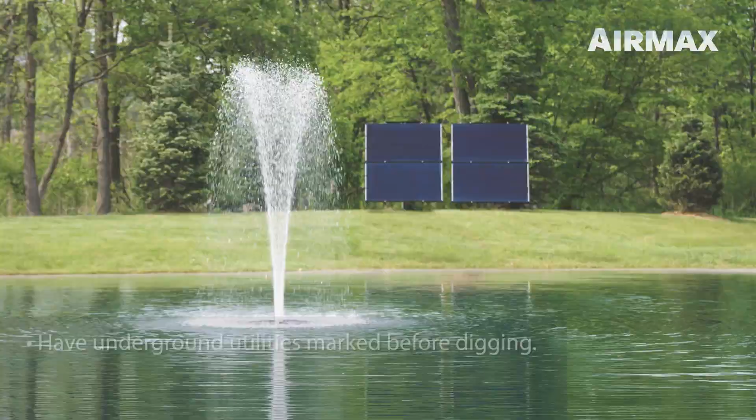Refer to your SolarSeries fountain product manual for a complete list of tools and hardware required. Before deciding on a location for the EasyMount assembly, be sure that the holes for the galvanized poles will not interfere with any underground utilities or irrigation systems. Select a location that is well above the high water mark with optimum southern exposure. The location should remain clear of any obstructions, such as shrubbery, trees, fences, or buildings that could limit exposure.

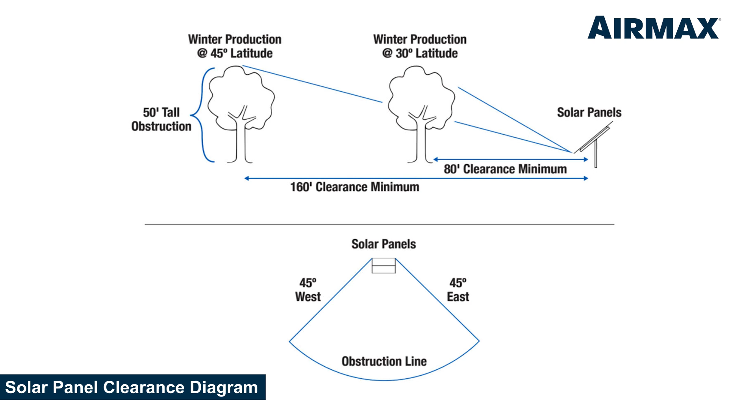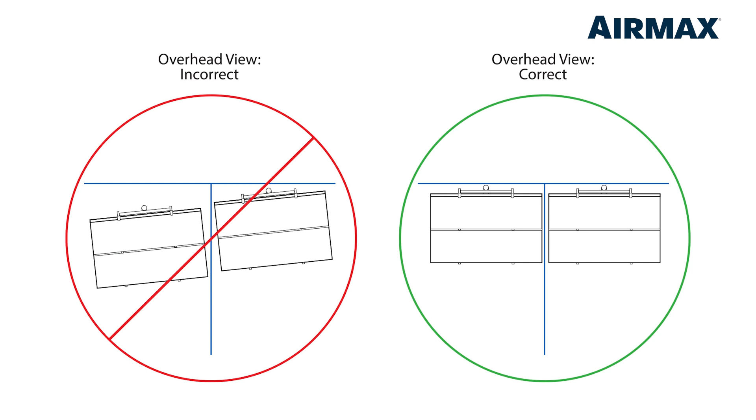Before marking out your two post hole locations, be sure to establish a plane that is perpendicular to solar south. Solar south is determined by the pivot angle needed to achieve optimum southern exposure based on geographical regions. Establishing this plane will ensure both sets of solar panels can be installed so that one assembly does not interfere with exposure to the second solar panel assembly.

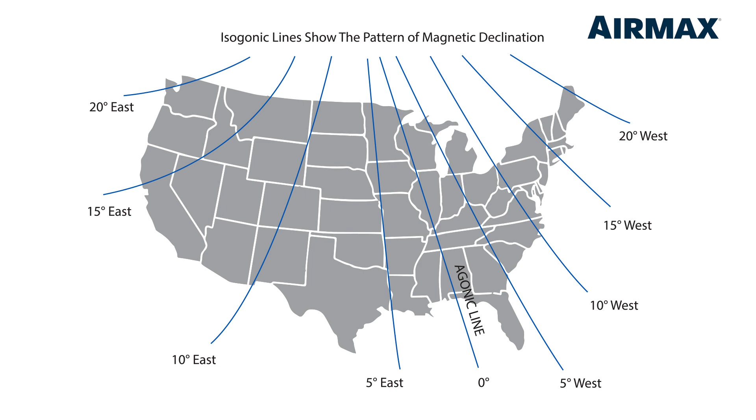To establish this plane, first, calculate the offset from magnetic south. You can refer to the National Oceanic and Atmospheric Administration website included in the product manual to calculate this offset based on your zip code. Or you can estimate the pivot angle based on your approximate location using the magnetic declination map of the continental US.

Once you've estimated your offset from magnetic south, lay one of the 10-foot galvanized poles on the ground and use a compass or compass app as a reference to position the pole perpendicular to magnetic south. Then pivot one end of the post in the appropriate direction based on the offset you establish for your region. This offset from magnetic south will establish solar south and your optimum sunlight exposure.

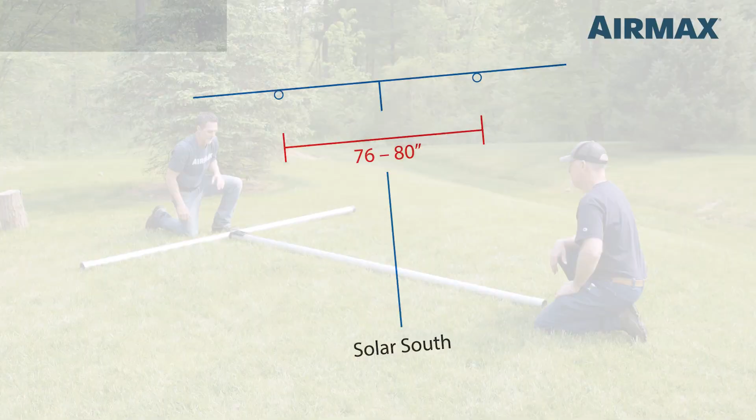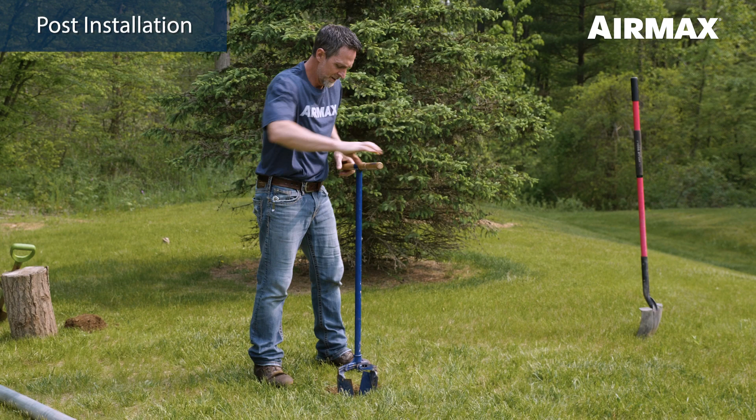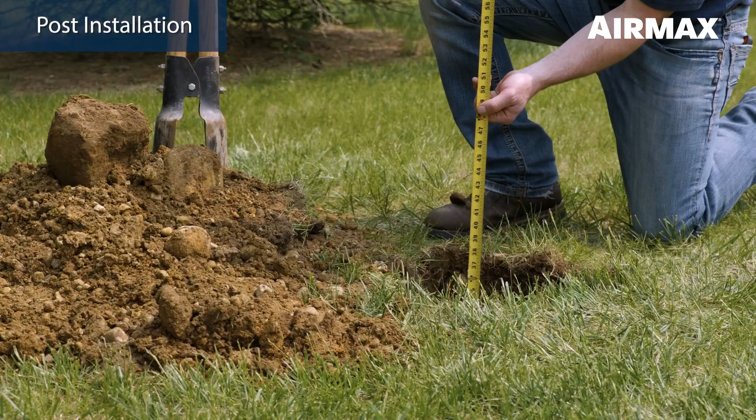The posts should be approximately 76 to 80 inches apart to leave 8 to 10 inches between each set of solar panels. This spacing will help prevent human traffic that could potentially interfere with solar panel wiring. Next, use a post hole digger or auger to create two 8-inch to 10-inch diameter holes along the line established in the previous step. Holes should be a minimum of 36 inches deep. This depth should leave you approximately 84 inches above grade for your EasyMount assembly.

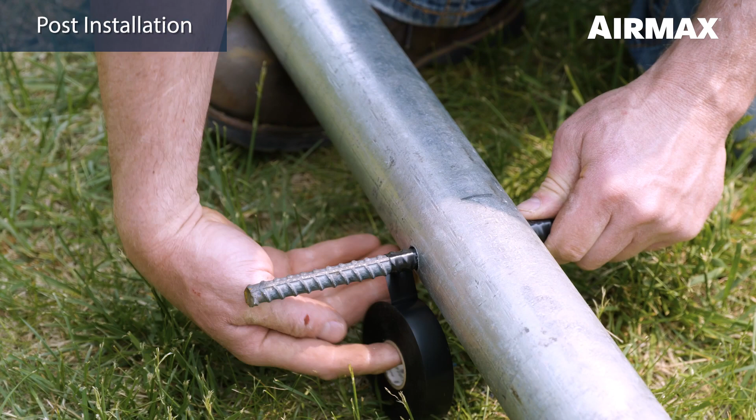Use a 5/8 inch drill bit to drill a hole through each pole 8 to 10 inches up from the bottom. It may be helpful to pre-drill a pilot hole with a smaller drill bit first. Insert a 1/2-inch piece of rebar into each hole so that an equal amount shows out each side. Hold the rebar in place with tape or a zip tie to keep it centered in the post until it is set. This step is important to keep the post from rotating in the concrete under high wind conditions. We also advise against the use of pre-cut cardboard tubes inside the holes for the same reason. The use of such tubes can lead to the entire cylinder of concrete rotating under windy conditions.

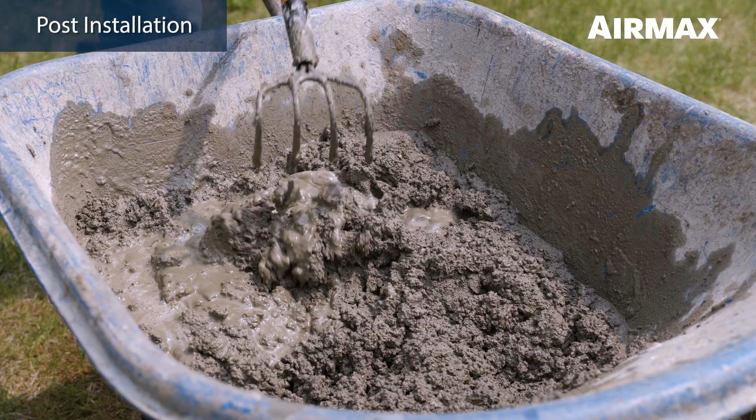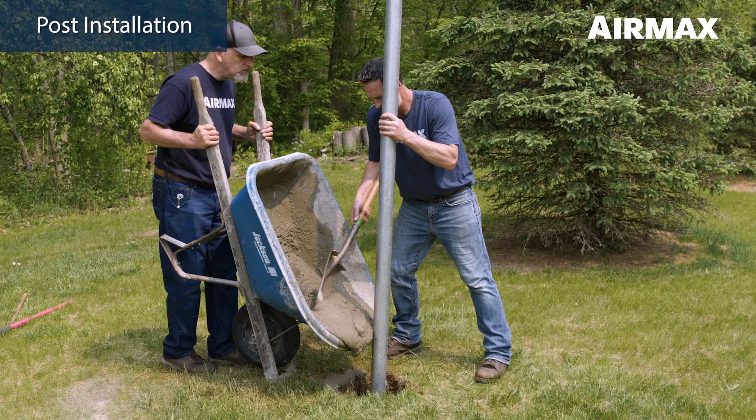Mix the concrete and water in a wheelbarrow according to the manufacturer's recommendations. Place a post in the center of the first hole and pour concrete into the hole until it is approximately 4 to 6 inches below grade. Keeping concrete slightly below grade will prevent curbing, which can lead to heaving during springtime frost in colder climates. Repeat for the second post. Plumb posts with a level and brace using 2x4 studs, clamps, and stakes. Allow a minimum of 48 hours cure time before installing the Airmax EasyMount assemblies and solar panels.

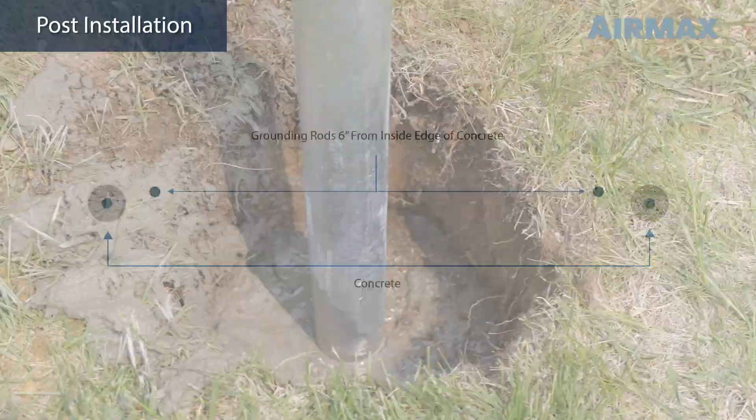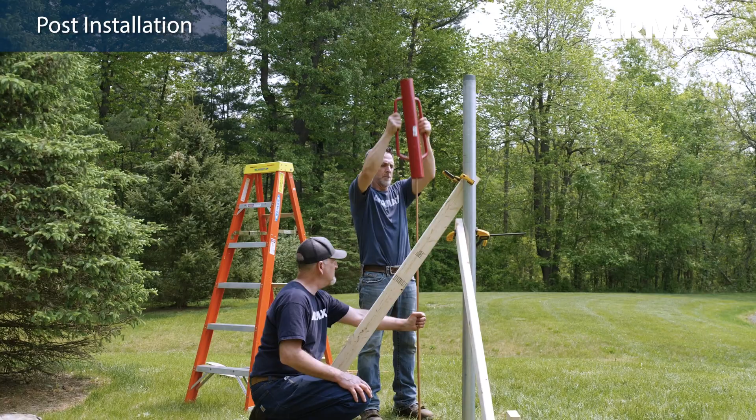We recommend installing the two grounding rods while the concrete cures. Drive an 8-foot grounding rod into the ground 6 inches away from the inside edge of the concrete, leaving approximately 6 inches exposed above grade. Repeat for the second mounting post. This rod will be used later in the grounding section of the installation procedure. The rods can be driven below grade after the rest of the system is installed and properly grounded. Before installing your EasyMount assembly, we recommend digging a trench for your power cord between the post and shore.

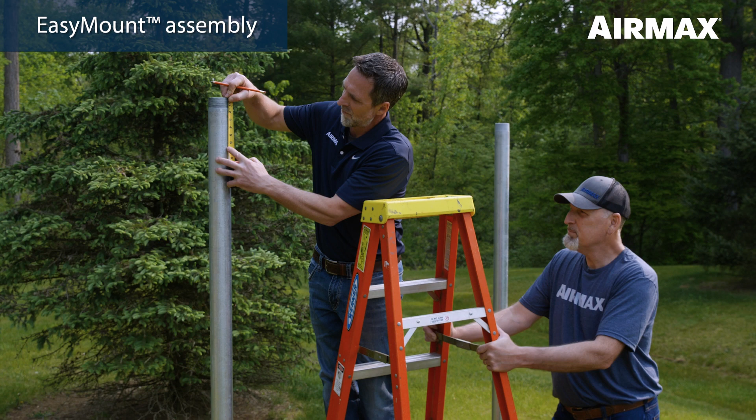To begin installation of your Airmax EasyMount system, first establish the recommended height for the main assembly by measuring down 3 inches from the top of each post and mark using a pencil or marker.

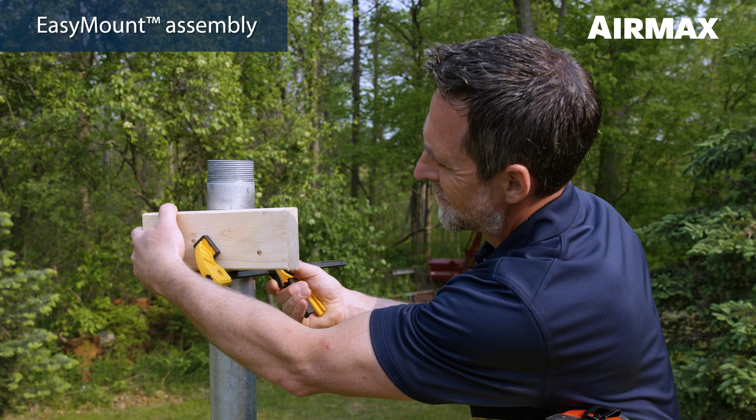If installing with one person, we recommend clamping a 2x4 block 4 to 6 inches long to the post at the 3-inch mark using a large clamp. This block will provide a shoulder or shelf for the upper beam of the EasyMount main assembly to rest on while installing the U-bolts in the next step.

First, rest the EasyMount main assembly upper beam on your block and secure in place using the two U-bolts, washers, lock washers, and nuts. Tighten a half-turn past hand tight using a 3/4 inch deep well socket wrench. Secure the lower pole mount beam with the second U-bolt and tighten 1/2 turn past hand tight. Leave the U-bolts loose enough to pivot the assembly.

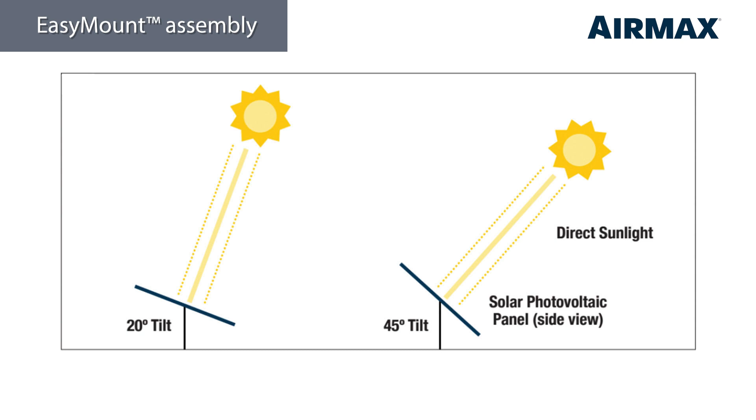Next, pivot the EasyMount assembly in the desired direction to face solar south, based on the recommended angle for your region, and tighten all 4 bolts securely using a 3/4 inch deep well socket wrench. Use the latitude of your region to set the optimum tilt angle. Some smartphones or compass apps will include your latitude and longitude on the screen, or you can refer back to the NOAA website recommended in the product manual.

If neither of these options are possible, you can also refer to the table in the product manual to estimate your latitude and recommended tilt angle. If you will not be running your system in the winter months, then simply use your latitude as your reference point and set your tilt angle to the angle closest to your latitude.

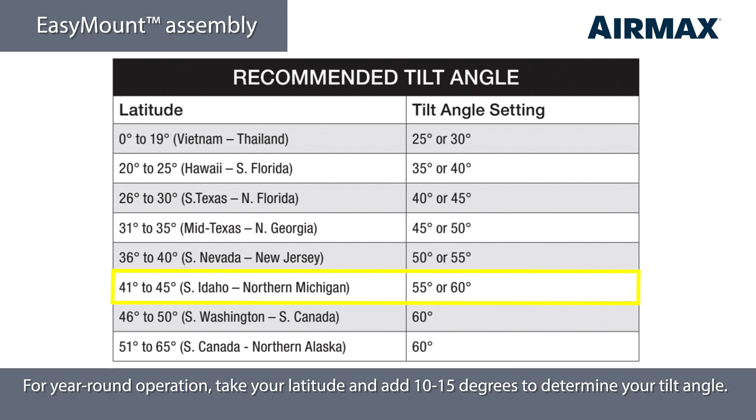However, if you plan to run your system all year, take your latitude and add between 10 and 15 degrees when setting your tilt angle to get optimum performance when daylight hours are at their shortest. For example, a 42-degree latitude should be set to 55 or 60-degree setting on the EasyMount support rail. This will give you the optimum tilt angle in the winter months when daylight hours are reduced by 50%. Solar panels will receive ample sunlight during the other seasons, even when set for winter operation.

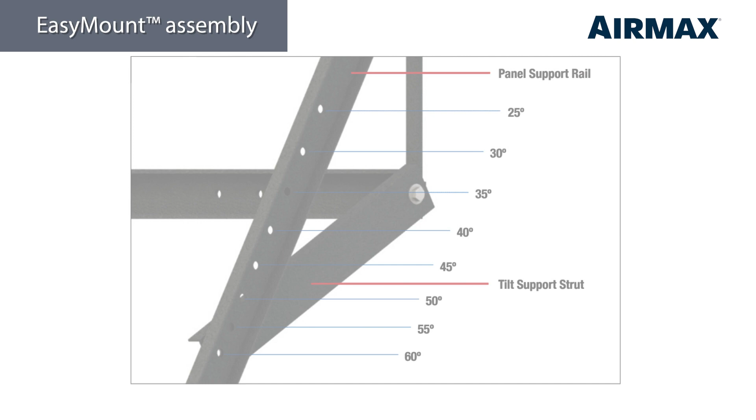Next, refer to the tilt angle settings in your product manual and attach your tilt support strut to the appropriate hole in the panel support rail. The angle settings are based off of the difference between the horizontal plane. Remove the tilt support hardware from the temporary location on the support rail. Secure each support strut in place with the tilt support hardware and tighten completely using 2 3/4 inch wrenches.

Continue by installing a panel support rail extension. First, remove the 2 bolts, lock washers, and nuts from the end of the rail extension connector and attach to the panel support rail. Tighten using one 7/16 inch wrench and one 7/16 inch socket wrench. Repeat for the opposite side. Lastly, tighten the 4 pivot bracket bolts using a 3/4 inch socket wrench. Repeat steps 1 through 8 for the second post and EasyMount assembly.

First, position a single-sided solar panel clamp at the bottom edge of one panel support rail extension and tighten using a 7/16 inch wrench. Do not tighten the top hex bolt as you will need room to slip the bottom edge of the solar panel frame into the clamp. Repeat for the second panel support rail extension.

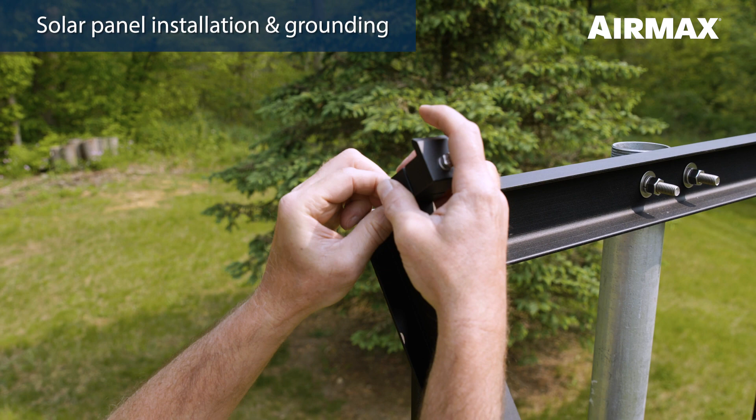Position one double-sided solar panel clamp at the joint between the panel support rail and the rail extension. Repeat for the second panel support rail extension. Place the second double-sided clamp in the same position on the opposite support rail. Next, position a single-sided solar panel clamp at the top edge of one panel support rail and hand tighten only. Repeat for the last single-sided clamp.

We recommend using 2 people when handling and installing solar panels. Avoid installing solar panels on windy days to prevent possible accidental damage to equipment. Position the first solar panel so that the wiring junction boxes will face the interior, ensuring all junction boxes face the solar panels on the adjacent solar post mount assembly once completed.

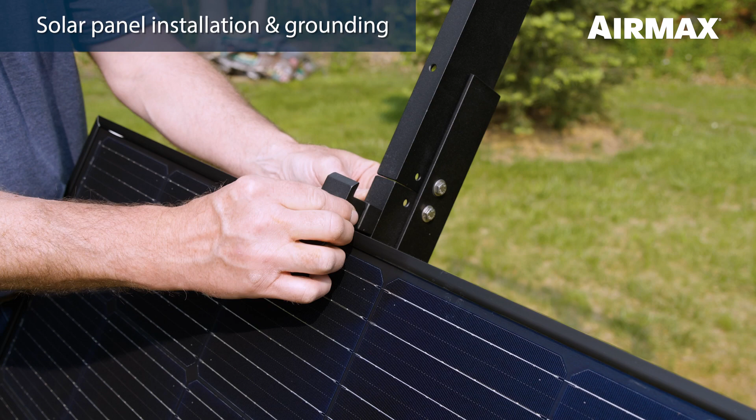Rest the first solar panel on the 2 lower single-sided clamps, making sure the face of the solar panel frame is beneath the clamp. Hand tighten each clamp. Next, loosen the double-sided clamp from the rail on each side. Then position the clamps so that they seat against the top frame of the solar panel.

Secure clamps to the rail, but leave the top hex bolt loose to allow for positioning of the next solar panel. Position the second solar panel atop the double-sided clamps, making sure that the wiring junction boxes face the same direction as the lower panel and hand tighten. Then, slide the top 2 single-sided clamps down until they seat against the top frame of the upper solar panel. Secure the clamp to the rail with a 7/16 inch wrench, but leave the top hex bolts only hand tight.

Use your tape measure to center both the upper and lower solar panels widthwise on the panel support rails. It should measure approximately 17.5 inches from support rail to solar panel frame on each side. Once the solar panels are properly centered, secure all clamps using a 7/16 inch wrench, but do not over-tighten. Tighten all bolts securing the clamps to the rail as well as the upper bolts securing the solar panels in place. Repeat the process for the second set of solar panels.

To properly ground the system, first attach a grounding lug to the center grounding location of each solar panel using the screw and nut provided. Tighten each using a Phillips screwdriver. Feed one end of the 12-foot copper grounding wire through each of the solar panel grounding lugs and secure using a slotted screwdriver. Next, slide one ground rod clamp onto the opposite end of the 12-foot copper grounding wire.

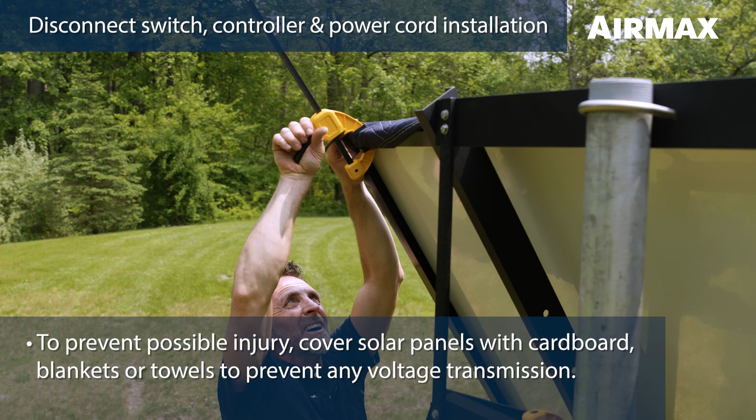Loosen the bolt on the ground rod clamp and attach it to one of the U-bolts on the EasyMount assembly and secure in place, making sure the grounding wire is making good contact with the U-bolt. Be sure to leave some slack in the cable in case the solar panel tilt angle should ever be changed. To prevent possible injury, cover solar panels with either cardboard, blankets, or towels to prevent any voltage transmission through the solar panel cables during installation.

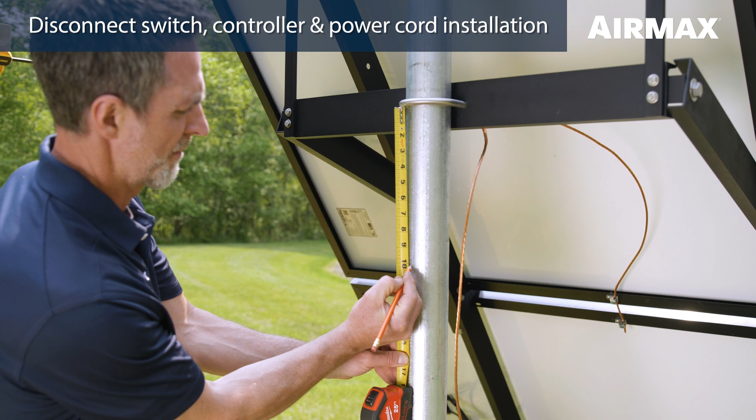To install the disconnect switch and controller assembly, measure down 10 to 12 inches from the lower U-bolt on the EasyMount main assembly and make a mark on the post. The disconnect switch and controller assembly can be mounted to either post. First, remove the 4 Allen bolts holding the controller and disconnect switch mounting brackets together.

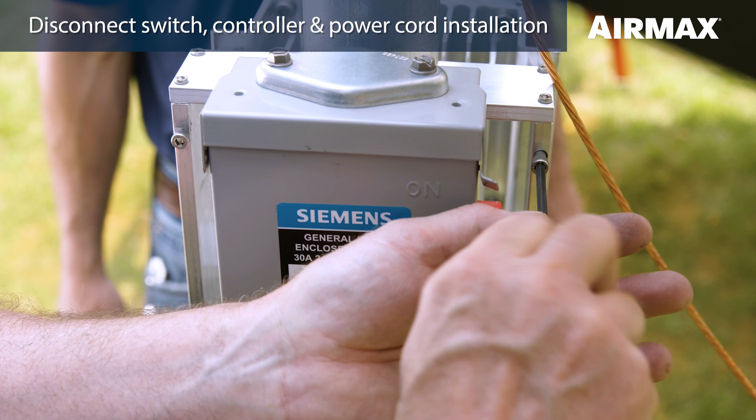Position the top of the disconnect switch mounting bracket at the mark. Then attach the controller mounting bracket to the shutoff switch mounting bracket using the 4 Allen bolts. Secure in place using a 3/16 Allen wrench. When secured, the switch and controller should be parallel to the solar panels, making each easily accessible.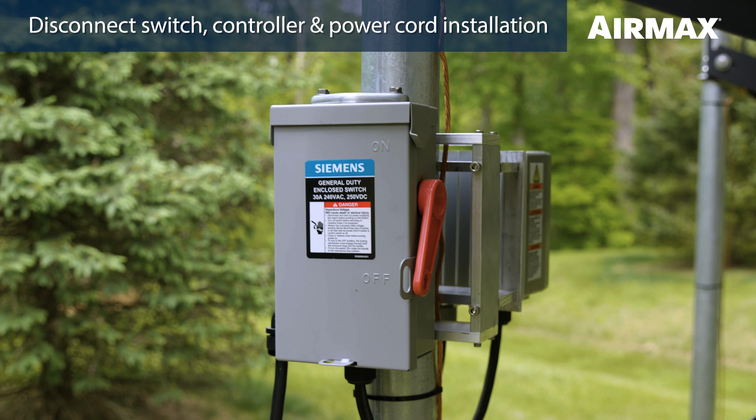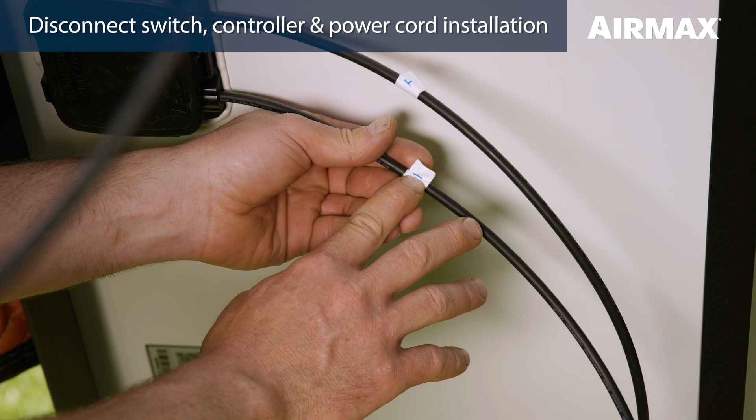Be sure to leave the switch in the off position until all wiring is complete and the fountain has been moored in the water. Using the MC4 cables provided, wire the 4 panels in series, making sure the negative lead exiting the switch is connected to the negative side of the first solar panel. Then wire each subsequent panel so that the wire exits on the positive and flows to the negative on the next panel. The positive terminal on the last panel will then provide the connection back to the positive connection at the shutoff switch. Cables on the solar panels are labeled with positive and negative symbols. A wiring diagram can also be found in the product manual.

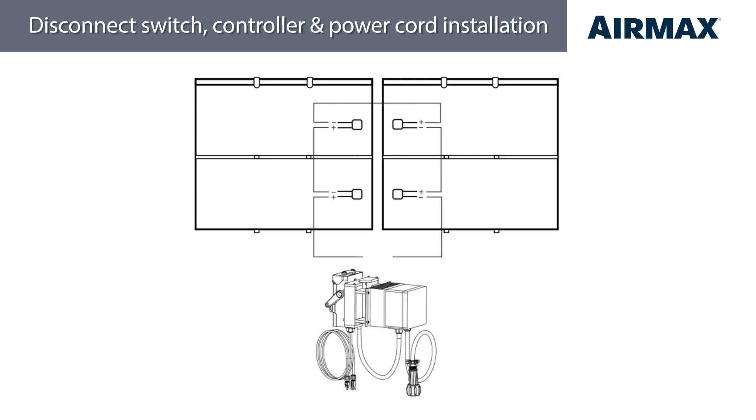Using the PVC conduit, run a fish tape through starting at the solar panel mounting pole. Attach the tape or a rope to the power cord end with the male threads, which is the end without the blue nut. Use your rope or fish tape to pull the power cord through the PVC pipe from the shore to the solar panel mounting pole. The power cord disconnect can now be connected to the output side of the controller whip.

If PVC pipe installation method is not needed, simply connect the fountain power cord to the controller output whip. We recommend using zip ties to secure the power cord and MC4 cables.

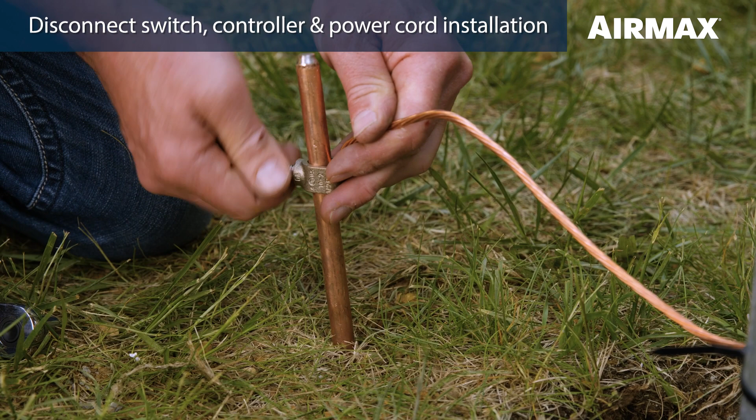Next, feed the remainder of the grounding cable down the pole and attach in 3 to 4 places using the zip ties provided. Feed the grounding cable through a ground rod clamp and temporarily secure in place at the top of the stake. Any excess cable can be buried alongside the grounding stake. Repeat the process for the second EasyMount assembly.

Finally, run the 8-foot grounding cable from the first to the second grounding stake. Loosen the ground rod clamp and feed the end of the grounding cable into the clamp and secure in place. Complete the process by feeding the grounding cable to the ground rod clamp on the second grounding rod and secure in place in the same manner. The ground rods can now be driven down until they are flush with the ground.

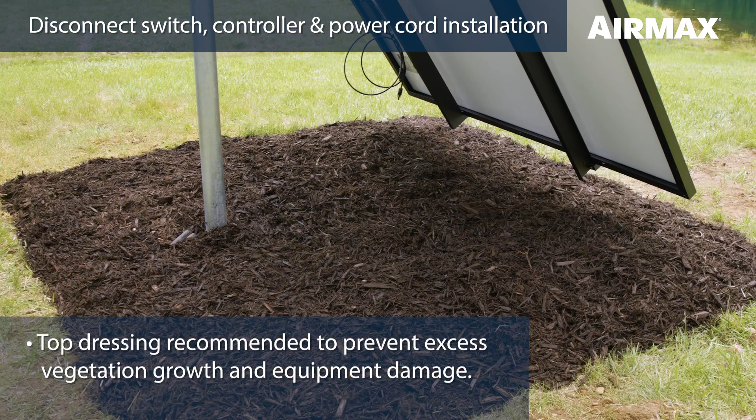We recommend using zip ties to secure the power cord and MC4 cables. Finally, we also recommend a final grade and surface prep to prevent possible future damage to equipment during lawn maintenance, as well as to prevent excess vegetation growth. To do this, simply cover the areas surrounding the solar panel mounting system with ground fabric and top with stone or mulch.

If you are unable to perform installation of your SolarSeries fountain, please contact your certified Airmax service technician and they can perform this installation for you.

First, select your spray pattern. The SolarSeries fountain automatically creates the classic pattern without a nozzle installed. The SolarSeries fountain also includes 2 additional spray patterns, the trumpet and crown and trumpet. To change a pattern, simply unscrew the nozzle nut, replace the pattern, and reinstall the nozzle nut, making sure to hand tighten only. We recommend removing the nozzle nut while displaying the classic pattern.

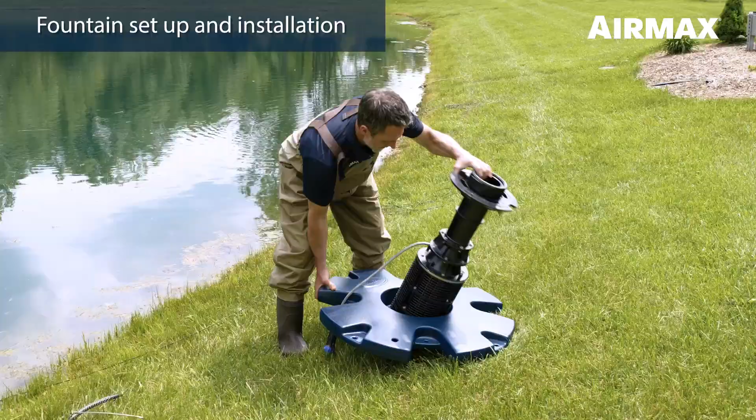Next, lay the float on the ground with the Airmax logo facing up. Place the fountain pump assembly into the center of the float. Lift the float straight up and ensure that the fountain pump lead power cord passes through the center hole. Gently lay the fountain to one side. Securely attach the power cord to the fountain pump lead quick disconnect.

Attach the power cord strain relief to either the bottom of the float mount ring or the bottom D-ring on the intake basket assembly. Attach a mooring cable, not included, using 2 outside mounting locations on the opposite sides of the fountain float. Pick up the fountain by the float and place it in the water. A minimum of 36 inches of water is required for proper operation.

If mooring the fountain to the shore, tie one side of the mooring cable to a stake and drive the stake securely into the ground. Take the other stake and mooring cable and walk around the pond, carefully pulling the fountain across the water. Once the fountain is in position, tie the second mooring cable to the second stake and drive securely into the ground. Ensure both mooring cables are snug to prevent the fountain from twisting and shifting during operation.

If center mooring the fountain using blocks or anchors, spread the blocks far enough apart so the mooring lines are snug and the fountain cannot spin from the force of the motor, which could cause the lines to become tangled.

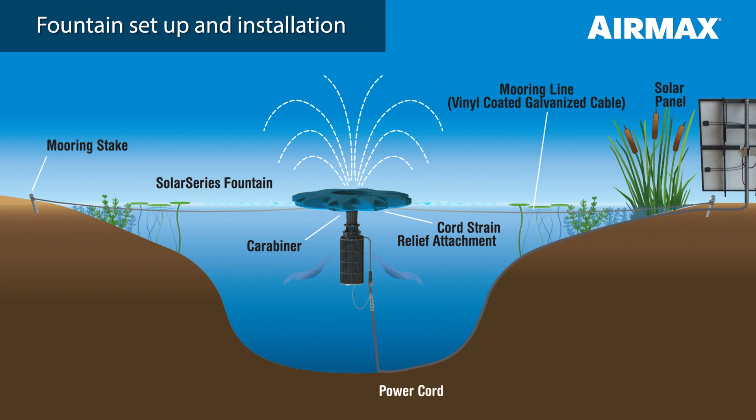After all connections have been made and the system has been properly grounded, you can test the fountain by first removing the cardboard, blankets, or towels covering the solar panels, then turn the disconnect switch to the on position. Depending on the quality of sunlight, a pattern should slowly emerge from the fountain.

The height of each spray pattern will be entirely dependent on the time of day and the amount of cloud cover that is present. Each spray pattern will reach its maximum advertised height and width when solar panels are exposed to maximum sunlight. Fluctuations in pattern size throughout the day are perfectly normal and should be expected. If the fountain does not produce a pattern upon initial startup, refer to the troubleshooting section in the product manual.

For fountain removal, storage, and preventative maintenance, refer to the winter removal and storage section of the product manual. Following the procedures outlined in this video will help you get the most out of your Airmax SolarSeries fountain.